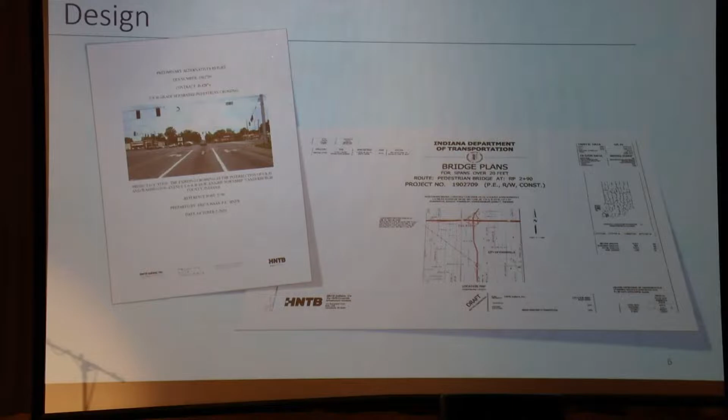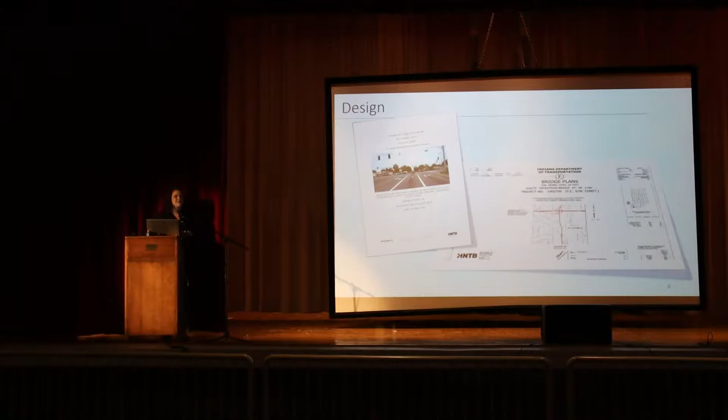We've explored the location and the type of crossing that would be most effective, and we presented those findings to you in late 2020 at that public meeting. We also had specifics for the chosen crossing, which is this pedestrian bridge. Since that last meeting, we've completed the preliminary design and finalized aesthetics. Those choices were again presented at the last couple of meetings, so we'll get into the aesthetics later. I know that's very exciting, and we're excited to show you those as well.

So here's a little bit more of the design. You can see the ramp system. This pedestrian bridge is going to provide safe passage over US 41. It's going to be a traditional truss-style bridge, modeled after the other pedestrian bridges you see on the Lloyd Expressway today. One little change: it's on the west side of the pedestrian bridge. You can see in this picture that the high rail trail is closer to the road, and that's with a little bit of a change.

We've straightened out that high rail trail, so right now it's a little bit of a curve. It will be straightened out, and that's a little bit of a change from when we last talked to you at the public hearing. Eventually, the at-grade crossing and the refuge island, which is right there in the middle of US 41, those are going to be removed after construction to encourage everyone crossing this intersection to use the pedestrian bridge instead of crossing 41.

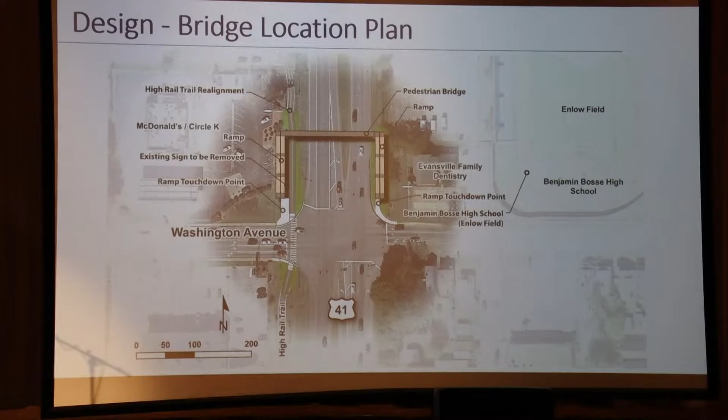So next, I'm going to show you a video of what it will look like when you use the pedestrian bridge, once it's complete. This video is also out in the lobby, so you might have seen it before, but I just wanted to walk you through a couple quick things on that video. If you're joining us virtually, this video will be posted online after this meeting, and it's also been on social media before, so there are lots of places you can see it in case it doesn't quite show up in the live stream. Let's take a look.

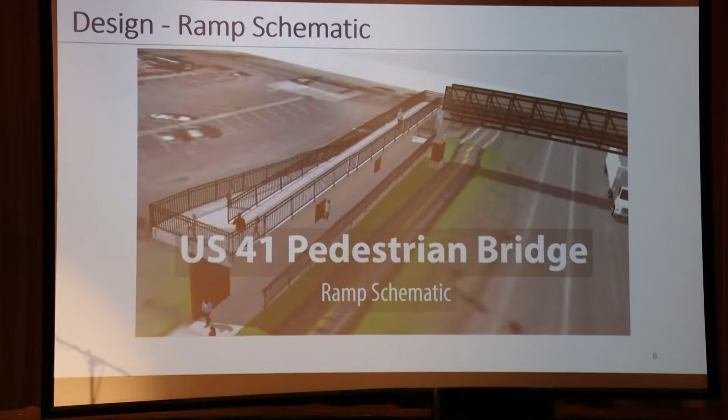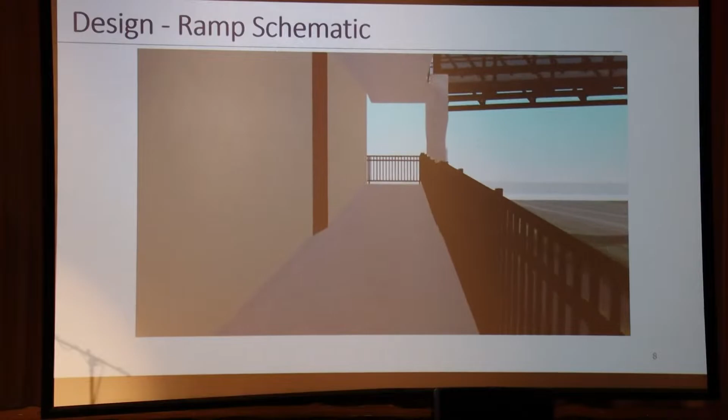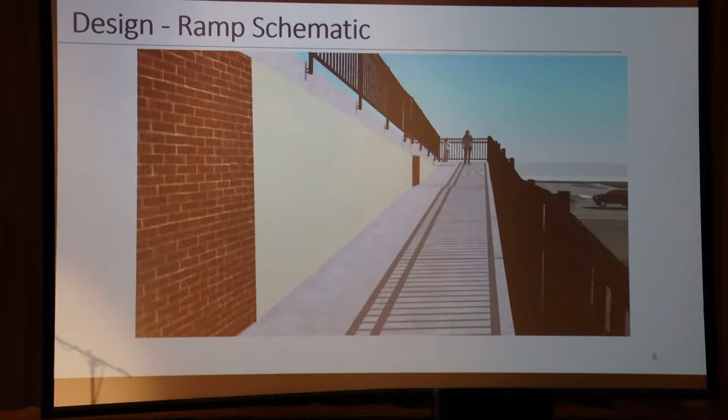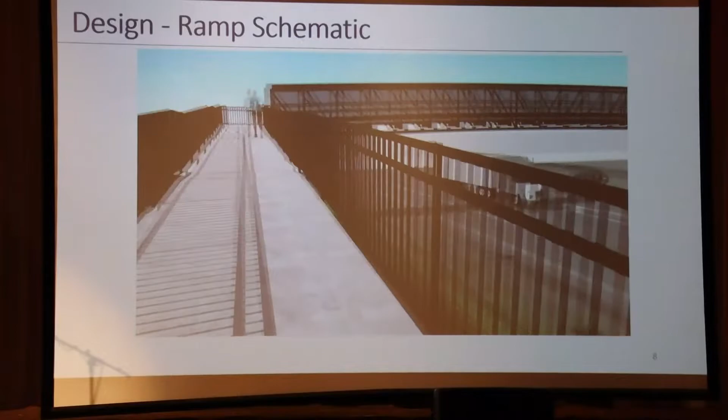This is basically just to give you a better idea of how that ramp system will look. You can see that you enter, and it will again provide that passage over US 41 so that pedestrians do not have to cross that street. An added feature of keeping that trail where it is and straightening it out is that drivers will be able to see pedestrians, bikers, and any trail users from the road right there instead of having them blocked by the pedestrian bridge. So the visibility of the trail users will be a lot better.

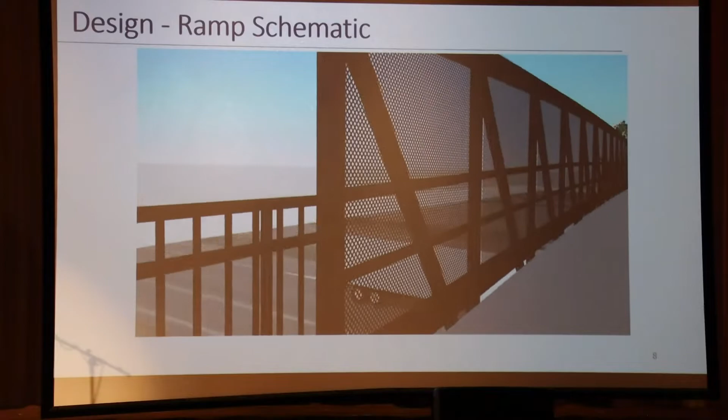You can also see that when you're up here, right at the top, you're going to be about 20 feet above US 41. And then as we moved along the bridge, you saw the slope and the landings. Those are all ADA compliant throughout the entire pedestrian bridge. So again, that video is pretty quick, but it's also out in the lobby, and we will post that after this meeting as well.

There were several environmental steps that INDOT had to go through for this project, as I mentioned before. The project team completed a document in the environmental process that evaluates the project's effects on the natural environment, the cultural resources, and the community, and we're going to go through all of those effects in just a minute. That full document is available for public review in a couple places in Evansville, at the Vanderburgh County Central and East Library locations.

Tonight we have a full copy of the environmental document if you would really like to stay and look through it. You might be here a while, it's about this thick, but we welcome you to look at any part of it. It's also going to be online, so if you'd like to go home and read it, you are welcome to.

The project team is going to review all the comments received, not only on the document here tonight, but throughout the public comment period. More information on how you can submit comments, especially if you're not here with us tonight, is coming up shortly, and the team will review every single one. Once the comments and any additional information are incorporated into the final environmental document, INDOT will review it and send it to the Federal Highway Administration for final approval. Then we can get to fun stuff like construction.

Moving on within the environmental process, we had to include an additional review called Section 106, which protects historical properties. We had to include this because the Lincolnshire Historic District is within the project limits, including Enlow Field and also right where we are today, Benjamin Bosse High School.

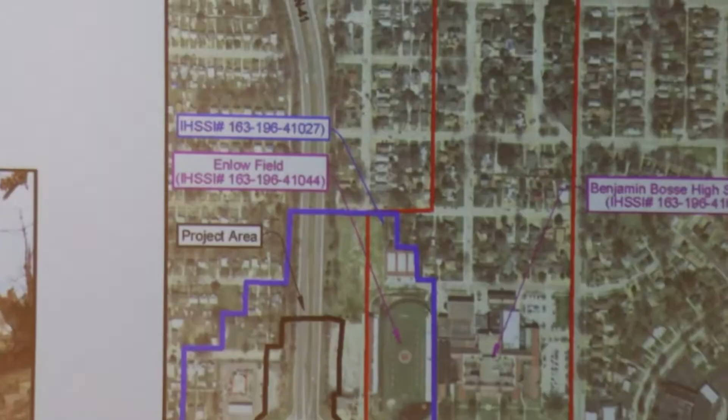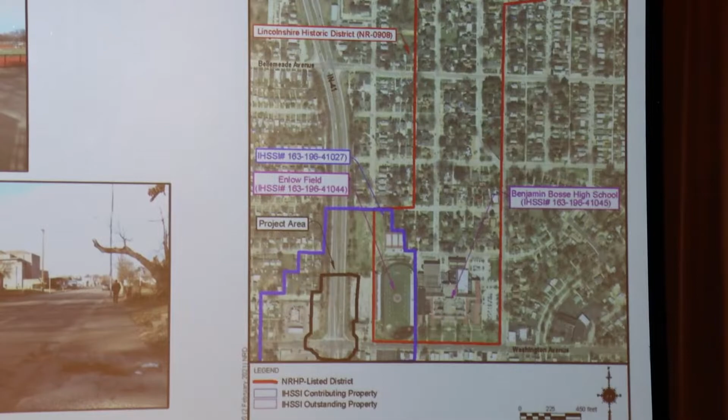You can see in this picture the historic district in relationship to the project. We have a bigger board with that outside if you want to take a closer look later. It was determined that this project would have no adverse effect on the historic integrity of this district. That determination was made in partnership with Indiana Landmarks, the City of Evansville's Historic Preservation Office, and the IDNR Division of Historic Preservation and Archaeology. INDOT consulted with many of these parties to make that determination.

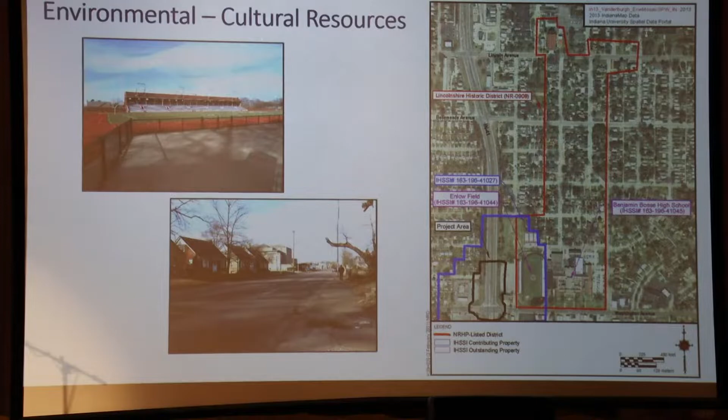Another environmental portion we had to go through was recreational use. We had to evaluate impacts on any recreational areas under Section 4F of the Department of Transportation Act. The City of Evansville was identified as the official with jurisdiction over this portion because of the High Rail Trail, located on the west side of US 41, extending from Riverside Drive to Walnut Street. This trail is a multi-use asphalt path with occasional park benches and amenities.

As we were designing the US 41 pedestrian bridge, INDOT determined there will be property acquisition from the High Rail Trail as well as relocation of a portion of the trail, straightening it out next to US 41 instead of that little curve. The trail will fall next to 41 on the east side of the pedestrian bridge ramp, decided because the increase in visibility will increase safety in this area.

After review, the project is anticipated to be a de minimis use of the trail, meaning there will be such a small impact it will not adversely affect the activities, features, or attributes of the park. That preliminary finding has been sent to the City of Evansville. All comments about this section received tonight during the public comment period will be sent to the City of Evansville as well, since INDOT has asked them to weigh in and agree with this de minimis designation.

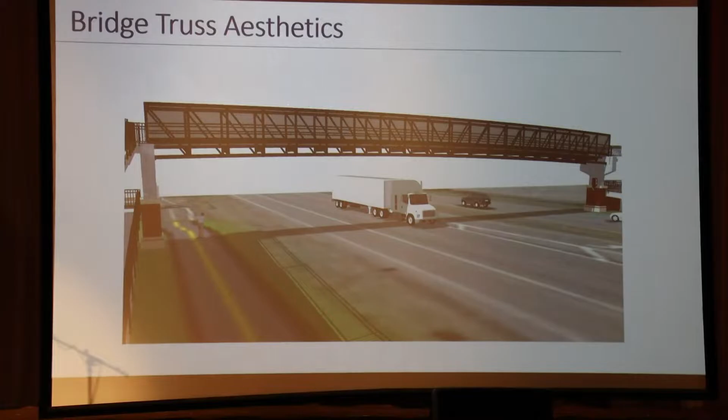Here is the pier. The preferred pier option is a traditional design. We're going to use a form liner to stamp the concrete to mimic chiseled limestone, and that can also include several accent colors. This design is similar to other structures around Evansville, so we're trying to fit the bridge in with the city and really be a part of the community.

This was the clear choice from the preference results tallied from public meeting number 2. The metal emblems on the bridge piers will match the Bosse High School logo, and the E you see is related to Evansville's campaign, The E is for Everyone. The city is encouraging people to create their own E's, and we wanted to match that right there on the bridge. Also, a fun fact: the B will be on the east side, technically next to the high school, so as you're driving next to the high school, you get that logo right there next to you.

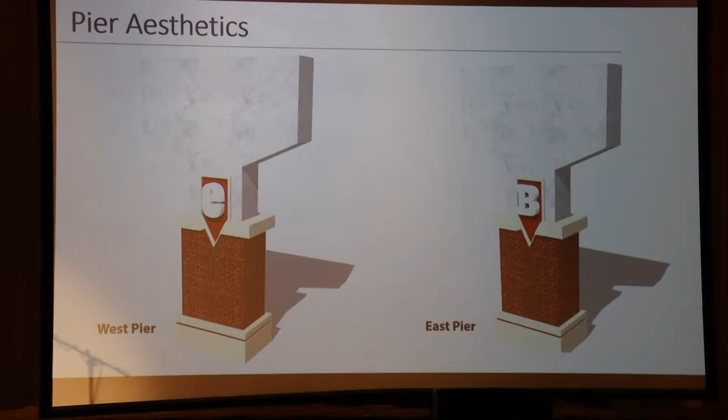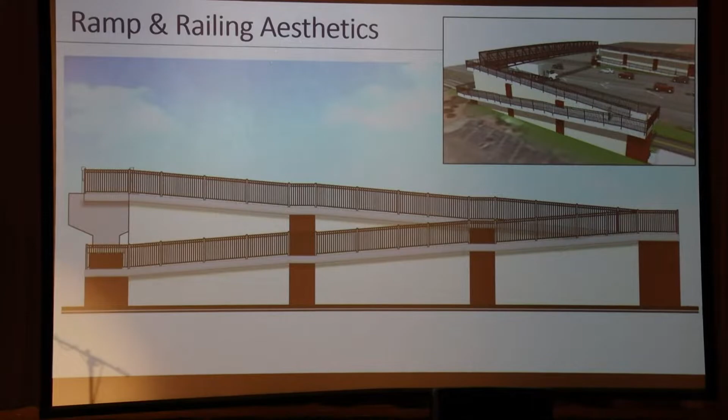You can take a closer look at this; we also have it online if it's a little small. Basically this is the preferred ramp and railing from the previous meeting. The brick is reminiscent of the historic district, so not only are we trying to mimic the pedestrian bridge you see on the Lloyd Expressway, but also with the brick we wanted to fit in with that historic district, which is why we had to do additional environmental work, because we want it to look similar and fit inside the community right here.

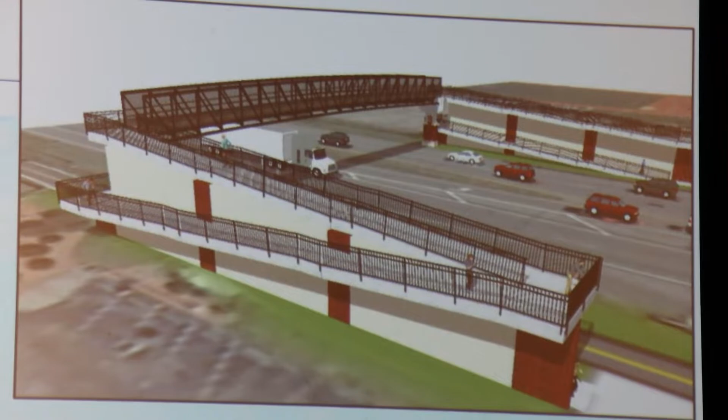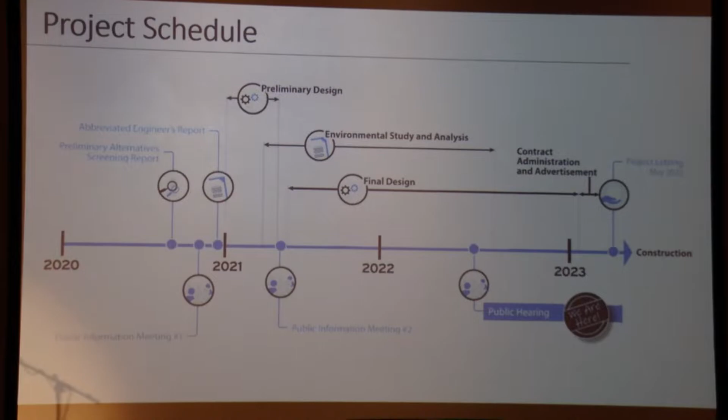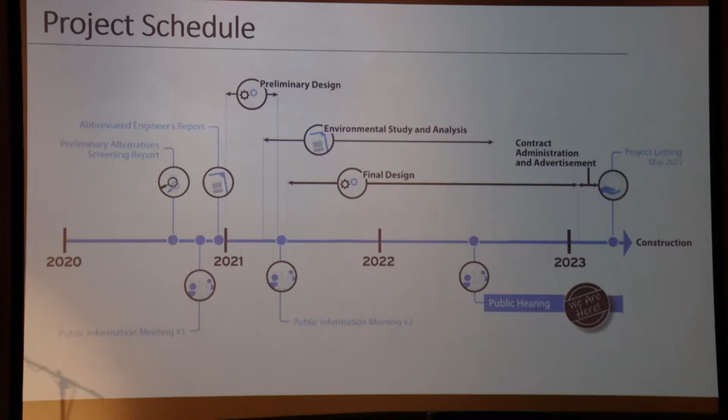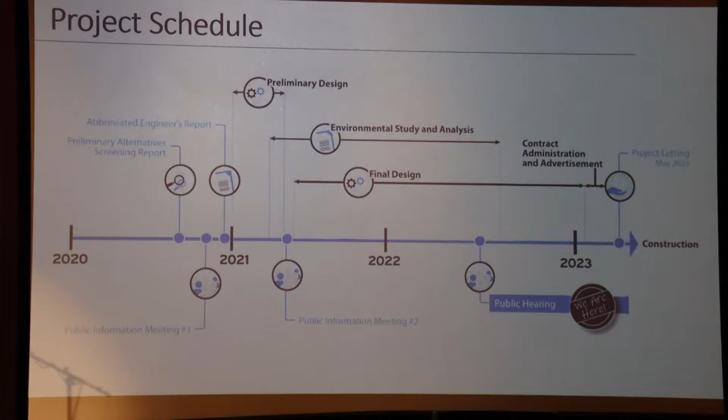So now let's take a look at where we're going. First thing is the project schedule. We're in the final public involvement section of the project, and you can see right there, we are here. After this comment period is over, on July 18th, INDOT is going to review all those comments and get the project ready for advertisement. Right now, we're looking to start construction on the pedestrian bridge in the summer of 2023. It will be a one construction season project. So in 2023, look for some construction, look for those barrels, and we'll finally get started on this pedestrian bridge.

As I've said throughout, we've had a lot of information, a lot of slides with pictures and designs and different aesthetics. You can see all of those on INDOT's website and through the INDOT Southwest social media channels. That's going to be your best bet to find updates on this project as we move toward construction over the next 9 months or so, into next year. The website and social media will have everything we've talked about here tonight, so feel free to use that as a resource.